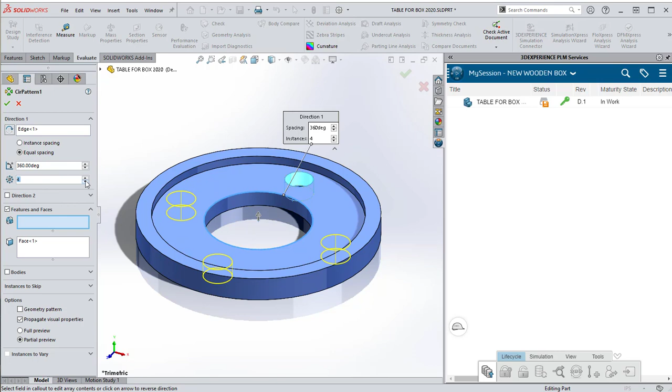I'm going to reserve this file and make a simple change. In this case, I'll change the number of holes from 4 down to 3. I now need to save this file up to the collaborative space.

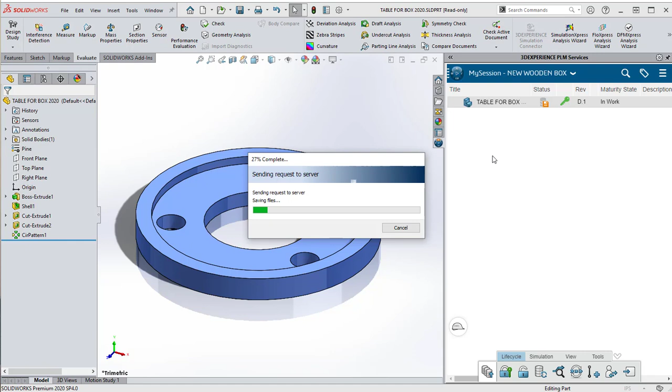I could choose Save with Options. But since I know that I wish to utilize the defaults, I'll choose Cancel, bypass that Options dialog box, and simply choose Save. The file is now pushed up to the collaborative space, and I'm ready to make some additional changes.

Here, I'll change the center diameter from 16 to 8, and I can simply right mouse button and choose Save.

So in summary, when we're pushing a file up to the collaborative space and we choose Save, we will use the default settings. This is very handy when you're making changes but keeping the file in the in-work maturity state. You can simply choose Save and move on to the next changes. However, if you need to adjust any of the options in that dialog box, you can choose Save with Options.

Now, let's talk about what happens when we're working with files which have been saved in a folder outside of the appropriate local working area.

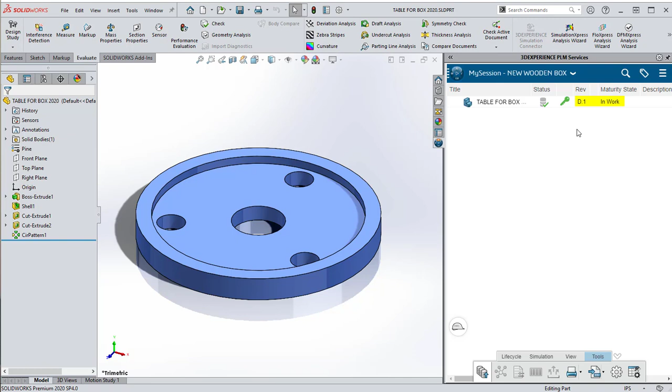I'm going to start out by closing this file we've been working on. As you can see, it's in revision D in work.

Next, I'm going to open the drawing that we created earlier in the video series. You may recall that this is stored in the S drive in our old SOLIDWORKS storage, which is outside of the appropriate local working area.

The drawing is opened, and we can see that there's some new icons over in the task pane. These icons are indicating that the files are not stored in the appropriate local working area and that they'll need to be copied when we perform a save to the collaborative space.

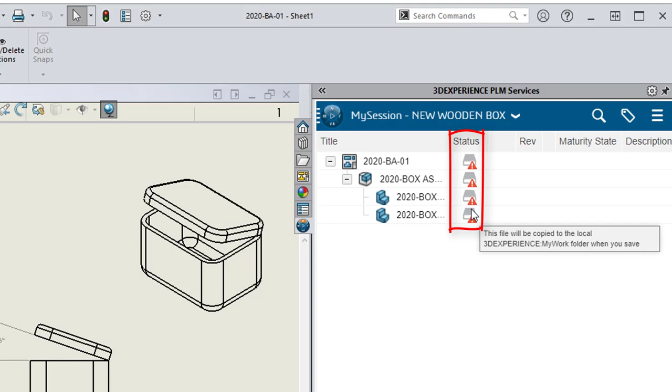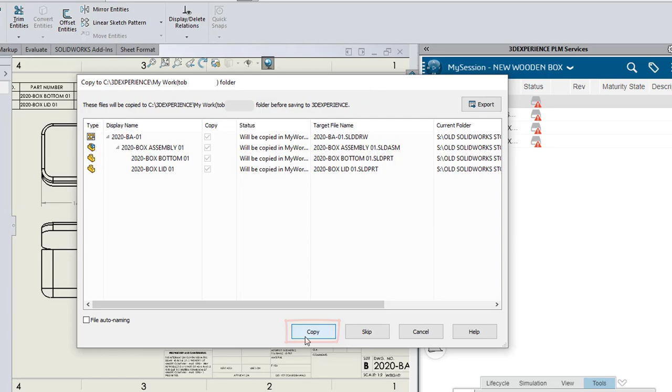Let's do that now. We right mouse button on the name of the drawing and choose Save with Options. This time we're presented with a new dialog box telling us that these files will now be copied to the appropriate local working area. So we choose Copy, and the files are copied into the appropriate local working area.

Here we can see, if we explore the folder called C 3D Experience My Work, the drawing, assembly, and both parts have now been copied into this directory. And if we go back to SolidWorks, we can see that the Save to 3D Experience dialog has automatically appeared, allowing us to now take these files and push them up to our collaborative space.

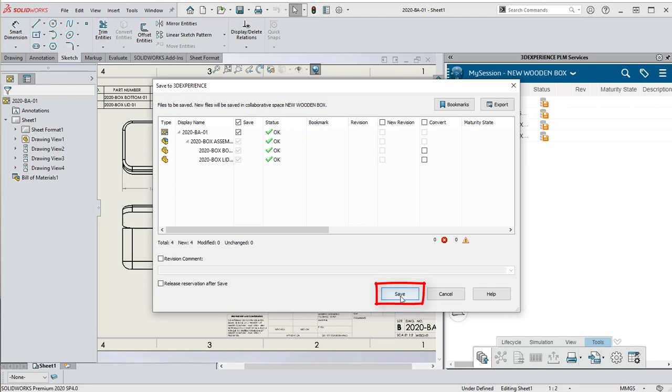Now, one thing to note here is that these files now exist in two different locations on your local hard drive. As we mentioned a moment ago, they've been copied into the appropriate local working area, but these files still exist in their original location in old SolidWorks storage.

I don't like having multiple copies of the same file on my local hard drive, so that's why I will discourage you from working with files which have been saved in a folder outside of the appropriate local working area. Instead, you want to make it a habit to always save and open from C 3D Experience My Work.

Now, to finish out this section on tips and tricks, let's talk about how we can search for recently uploaded files. Here we can see that the drawing 2020-BA-01 has been successfully uploaded, and the version in the collaborative space is the same as the version on the local hard drive. However, when we examine the web browser and refresh our collaborative space, the drawing

2020-BA-01 is not displayed. This is because files which have not yet been indexed by 3D Experience will not display in the collaborative space. We can, however, search for these missing files.

So we go up to the top of the screen and type in 2020-BA. We then press Enter to begin the search, but no search results show up. This, once again, is because the file has not yet been indexed.

But what we can do is examine this icon that looks like a clock. You'll see this icon throughout 3D Experience, and it's very handy when you want to access your information immediately and don't want to wait for 5 minutes for the next indexing cycle.

Here we can see, if we left click on this clock, we have two options: Search in my recent content, and Show all, meaning show all my files which have been uploaded but not yet indexed.

I'm going to choose Search in my recent content, and the search query for 2020-BA now returns one result: 2020-BA-01 drawing, the drawing which has been uploaded but not yet indexed.